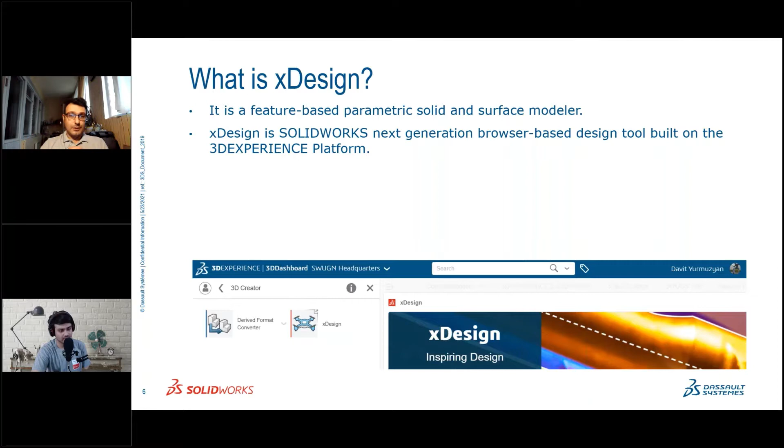It is a very powerful tool designed and developed by Dassault Systemes, and they collect all their powerful tools in one platform, such as CATIA tools, ENOVIA, SolidWorks tools, and other powerful products, and they collect all these in the 3D Experience platform. So xDesign is part of the 3D Experience platform, and xDesign is a cloud-based product.

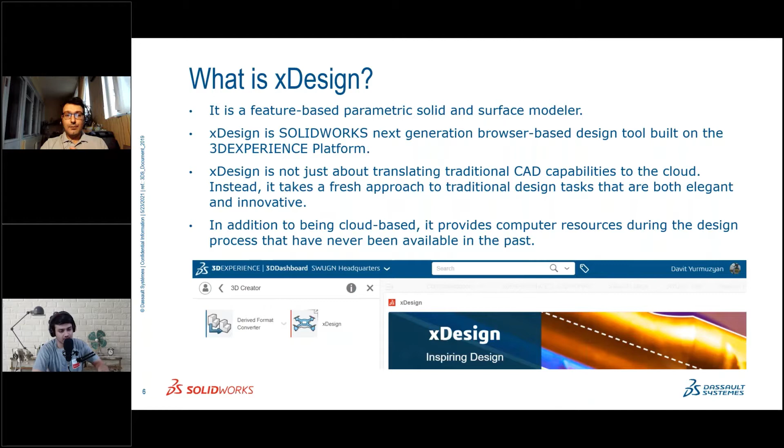I want to say that xDesign is not just about translating traditional CAD capabilities to the cloud, because with xDesign we can solve other design issues, and we can use non-traditional ways for solving them. And in addition to being cloud-based, it provides computer resources during the design process that have never been available in the past.

The main feature of xDesign is that we can run it on all devices, such as desktop, laptop, tablet, smartphones, and it's a very good capability of the product. And also, the next feature xDesign has is that we can run it on any operating system.

It's Windows, Apple Mac, Chrome, Android, Linux, and we can open it in any browser such as Chrome, Edge, Mozilla, Opera, and Safari. So these three things are very good capabilities of xDesign.

Also, I want to say one thing about SolidWorks and xDesign. xDesign and SolidWorks are not competitors, because SolidWorks meets specific engineering needs, and xDesign meets other specific needs. And what I said in the last slides, these features that xDesign has are very, very interesting for designers, for engineers who want to do something in other places, in other locations—this software can help him.

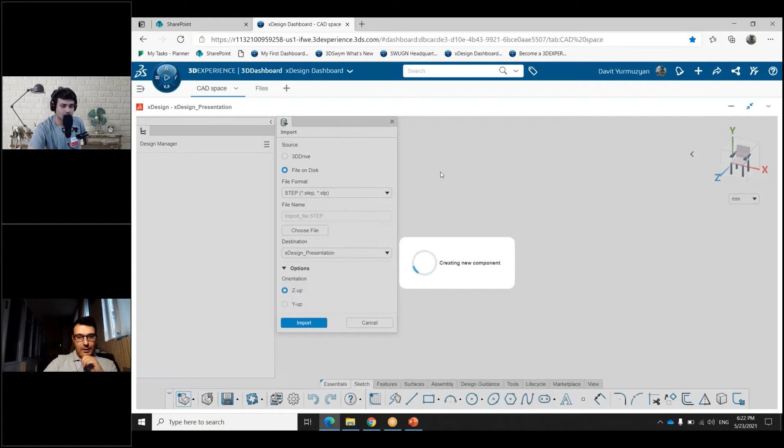Hey, hi Davit. Nikhil, I think his voice is not audible — can you check that? Yeah, his voice is not audible. Maybe he's not connected to the interface. Let me just toss another screen to him. Hello. Just quickly remind him. Hi Davit, I think your voice is not audible, can you please check on that? I think he's not connected to the interface, even he cannot listen, I guess. Okay. Hey Davit, can you hear me? Yeah, your voice is not audible, mate, can you check it out?

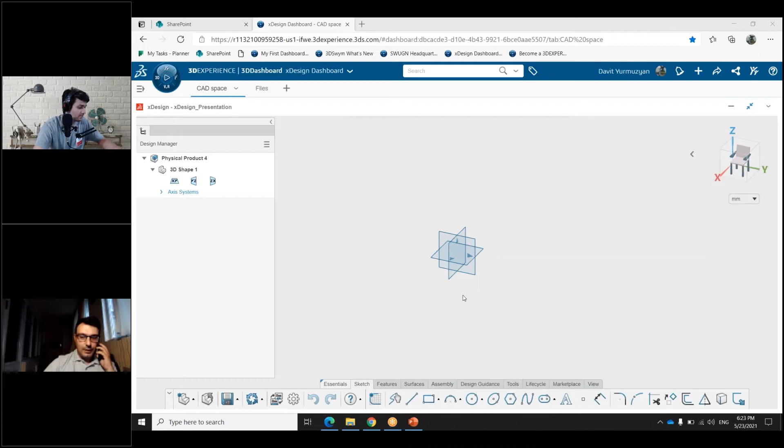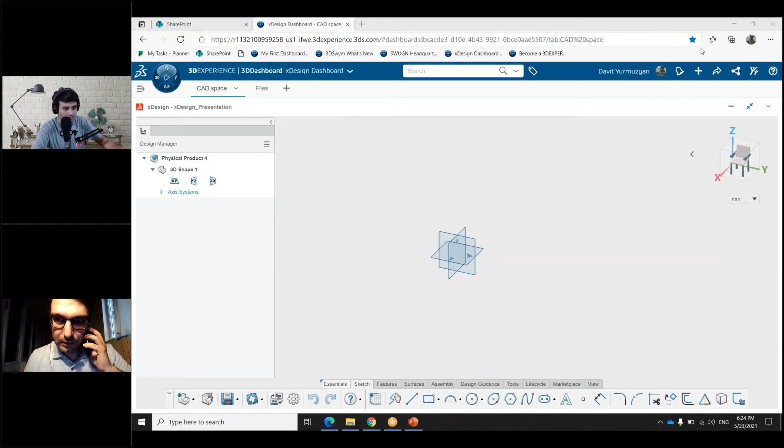Yes, can you check that out? You were not audible a couple of minutes ago, can you check it out? Sorry, can you check it out that we were not audible a couple of minutes before on GoToMeeting? Now you hear me? No. No. Nikhil, can you just ask him to leave the meeting and join again? Hey guys, he will join in a few minutes. Sorry, do you hear me? Yes, we can hear you now, and you again have the access of presenter — you can present now. Okay, in which slide did you not hear me?

Probably the one when you imported the part. Okay.

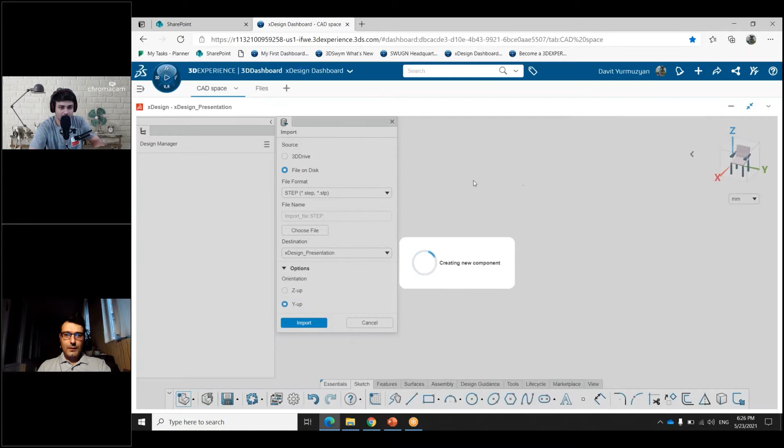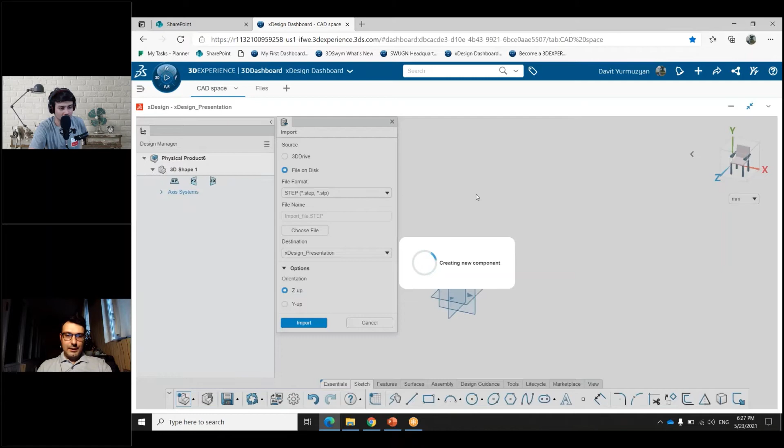So I said that when we import a part, you can choose which axis you want to be up, the z-axis or y-axis. It's a very interesting feature because if you're a SolidWorks user, your parts have the y-axis up, and you can select Y up and import the part. After that, you can see that in xDesign environment the Y axis is oriented up. But if we import and select Z axis orientation up, we will see this situation in the xDesign environment where the Z axis is up. This is a very interesting feature for this software because you can use it like CATIA and like SolidWorks — both SolidWorks and CATIA users have their capabilities in this software.

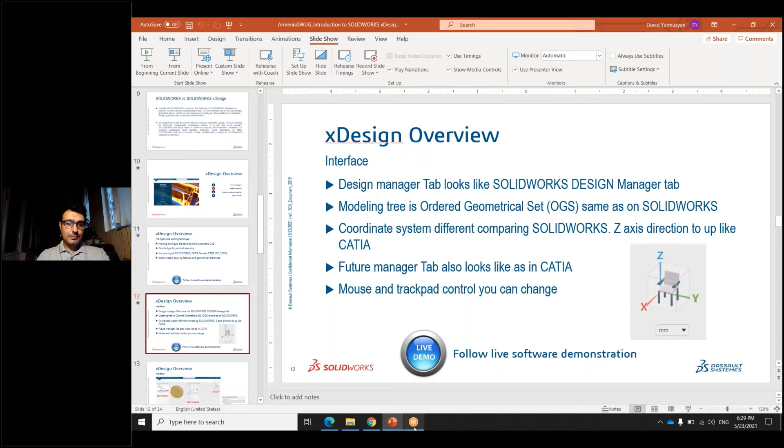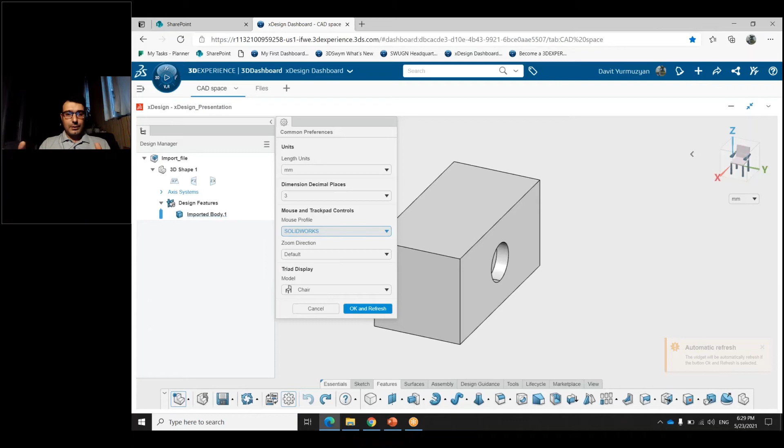Next, about mouse and trackpad control in xDesign. In xDesign we have a preferences option for mouse and trackpad control. If you are a SolidWorks user, you can select SolidWorks, and your mouse and trackpad control will work like SolidWorks. If you're a CATIA user, you can select CATIA, and your mouse and trackpad control will work the same as CATIA.

So this is an overview of the software, and also about tabs. In xDesign we have the same common tabs as other CAD software applications: a sketch tab with sketch tools, a feature tab with feature tools, standard features, applied features, patterns, and direct editing tools. We have a surface tab with surface features, assembly, and design guidance.

This is also a very interesting tab, but that's for a separate time. Maybe next time we can have a presentation about design guidance. There's also a tools tab with measuring tools and other tools, common tools, life cycle, marketplace, and view.

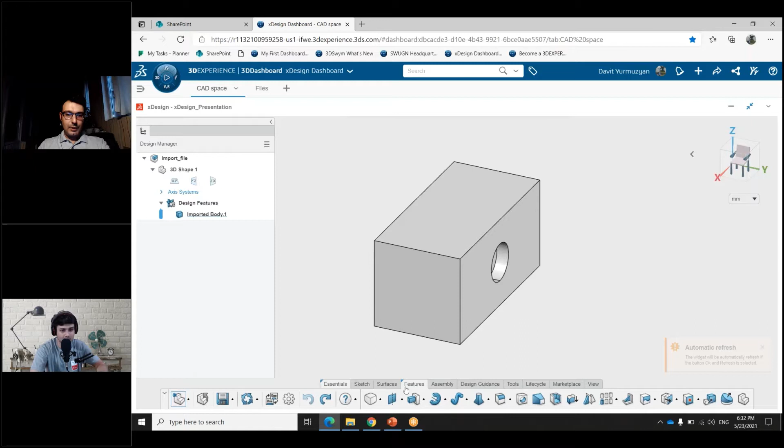So that's about the interface and overview of xDesign. Now we will speak about sketch and feature flexibility.

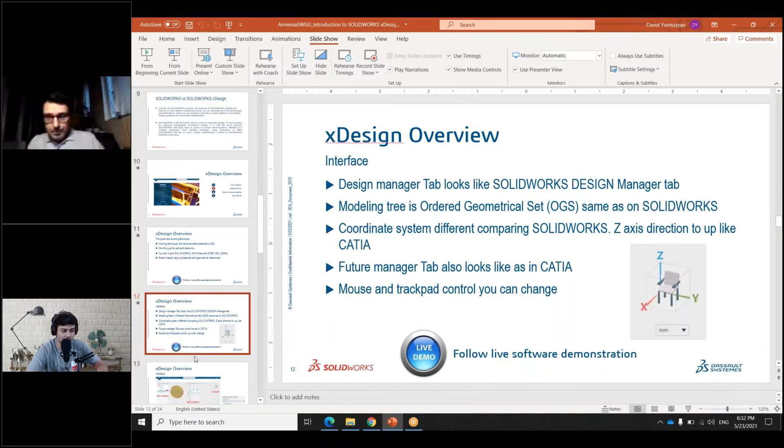So about sketch profiles, I will open a new part, a new component, to talk about sketch profiles.

In xDesign, if a sketch contour is closed, it's shaded. In the latest versions of SolidWorks we also have the same function, and I think it's a very cool feature, because when you're working with many lines and many curves in one sketch and you want to see a closed curve, you can easily see this shaded contour.

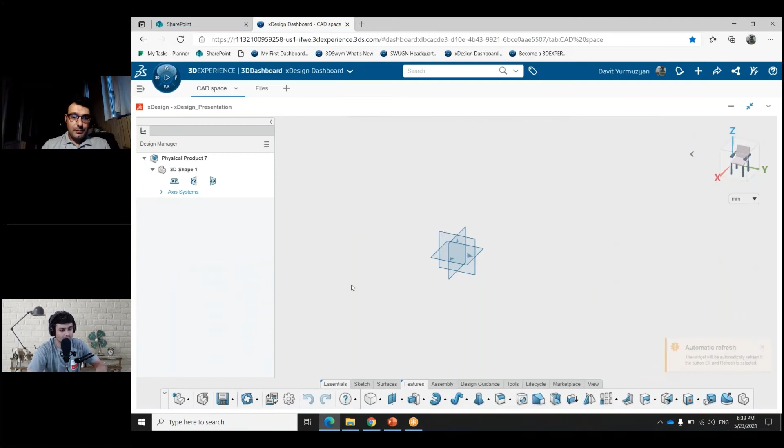For example, I will create a sketch. I can put a rectangle, and put a circle, and we can see that these sketches are shaded because they are closed.

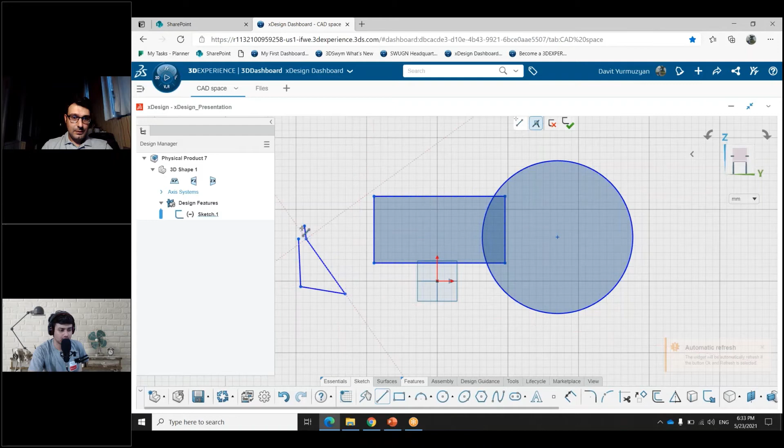If I put a contour that's not closed, this contour is not shaded.

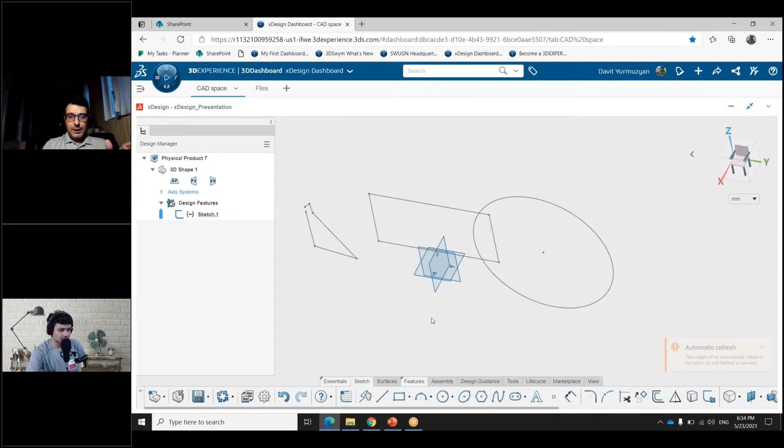This can also help you when you want to create a feature from the sketch. You can select the entire sketch for the feature. For example, for extrude, I can select the whole sketch.

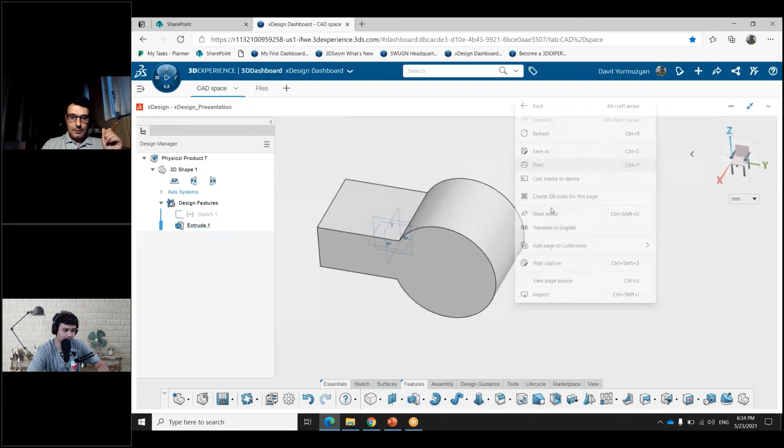And I can have this solid body. If I don't want to use all of this contour, with a double click in xDesign I can select only the part I want.

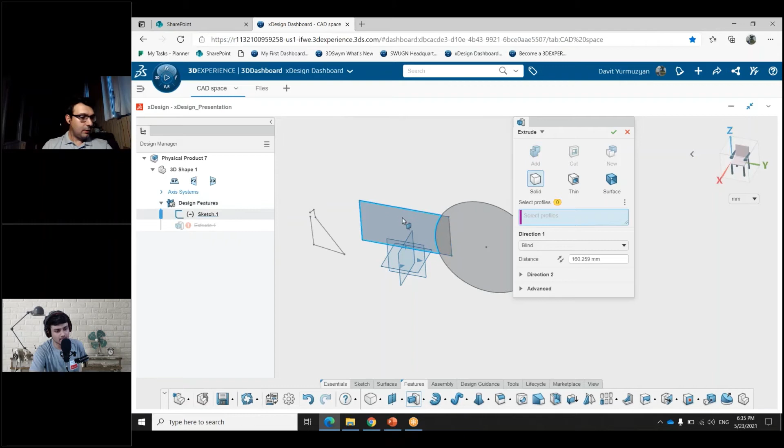So I want to use only this contour and this contour, and I can have this 3D model in the xDesign environment.

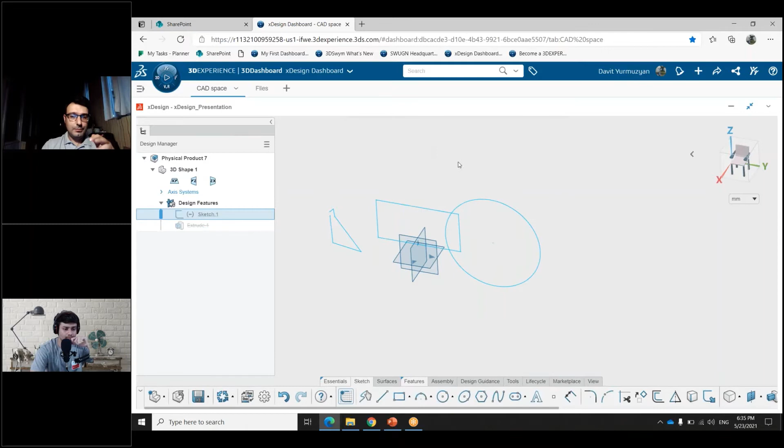Another cool feature in sketch flexibility is when you add a line or other contour to a sketch with edit. So I can add this circle there, and the feature which is based on this sketch does not change.

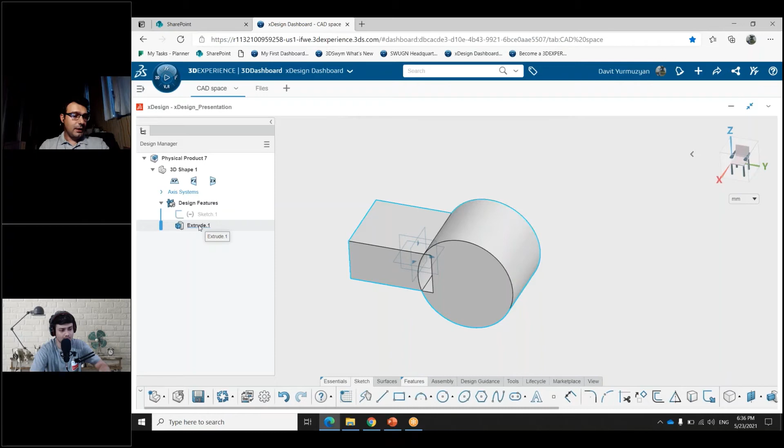In the latest version of SolidWorks we also have this feature, and it's very cool. But in other software I haven't seen something like this. Also in CATIA I haven't seen something like it, I'm speaking about the desktop version of CATIA, because in CATIA on the 3DEXPERIENCE platform we can see this function. So this, I think, is a very interesting tool for this application.

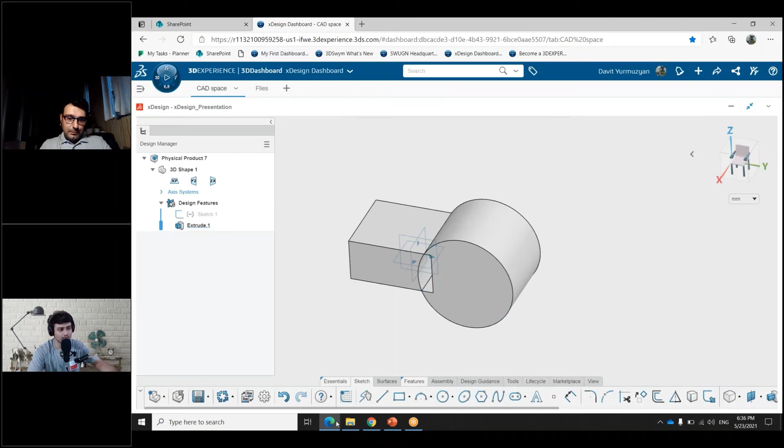Another very interesting tool in xDesign is the Sketch Helper. So what can we do with Sketch Helper? I will close this and open this file.

Even those heads-up displays prove beneficial, they save a lot of time while modeling, right? Sorry, I didn't hear you. The heads-up displays which we get while modeling are beneficial for saving a lot of our time, right?

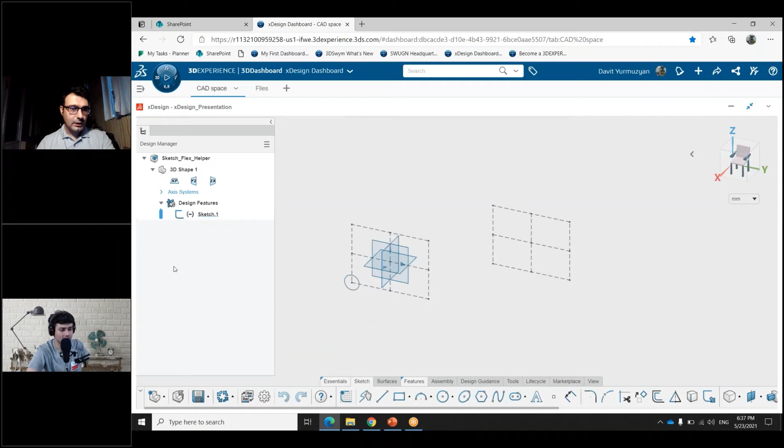About Sketch Helper? Yeah. Yes, but I want to show one thing. Why is Sketch Helper a very interesting tool? Because it's an intuitive tool, and for example, I created a sketch.

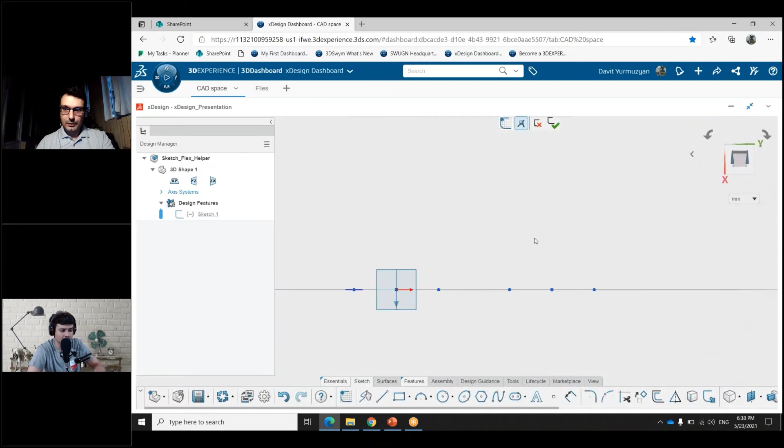When you want to multiply this circle, you can select Sketch Helper, and Sketch Helper can create this circle in any similar places. For example, when we select the checkbox, we can see that Sketch Helper created circles in similar other places, and this is a very flexible tool for sketch design.

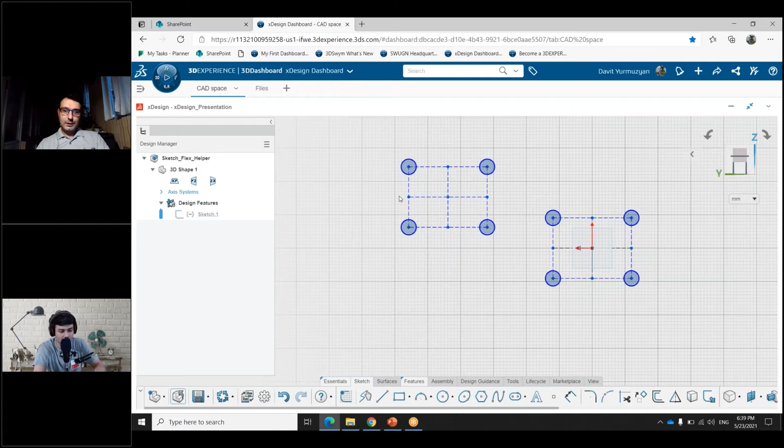So that's about sketch and feature flexibility. Next point, I will close this. Next point is super features.

I want to talk about super features because in other CAD software, also in SolidWorks, we don't have super features. So what is a super feature? I want to note about features, about sketch-based features. We have three main sketch-based features: extrude, revolve, and sweep.

These three sketch-based features: in extrude, we create with one sketch and move the sketch in a direction. In revolve, we use a sketch and rotate it. And for sweep, we move the sketch along a custom curve. So in these three types of sketch-based features, we have one sketch and one direction.

And if we look at it, we see that these three features are similar. In xDesign, we have interchangeability for these three features.

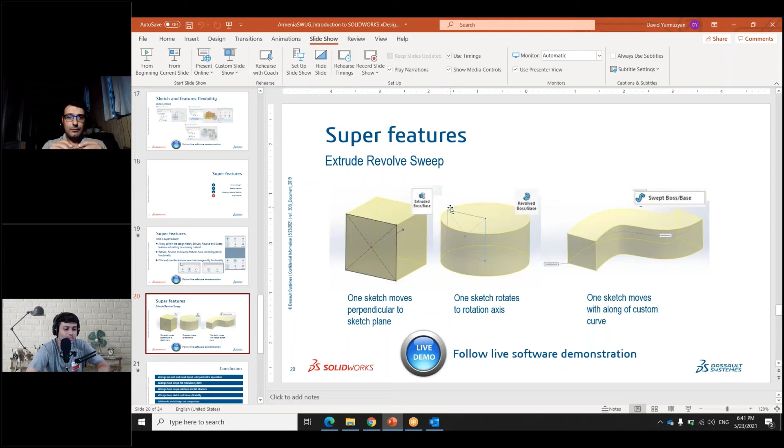At any point in the design process, in the design history or design tree, we can change extrude, revolve, and sweep features with each other, and we can also add or remove the function of these features. So I will open this file.

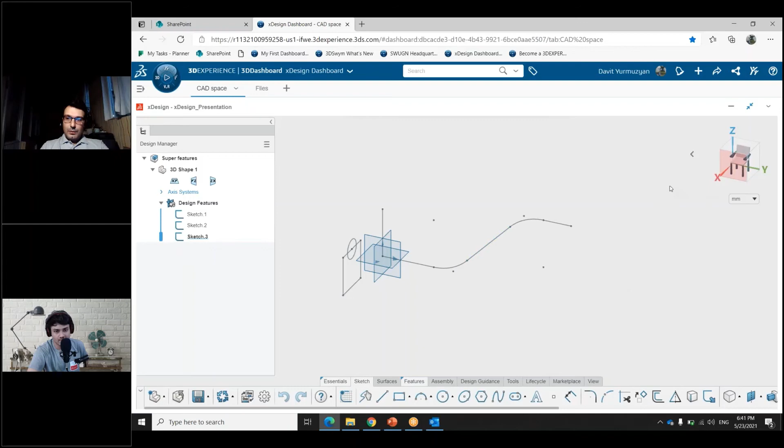So we have this file. Now I will create extrude. I will select this contour and select checkbox, and now we have extrude.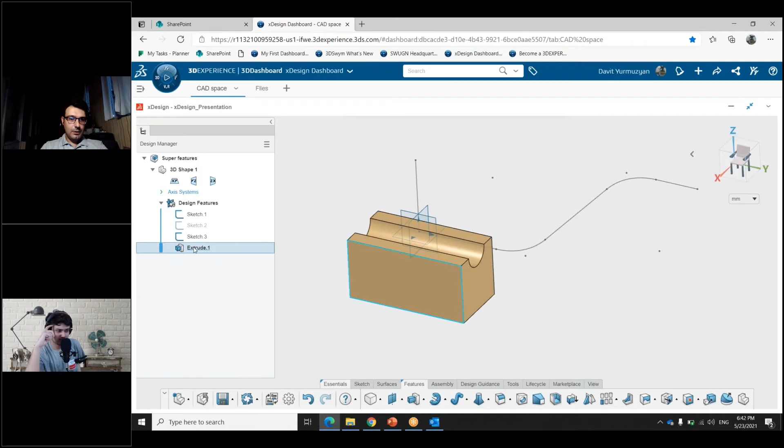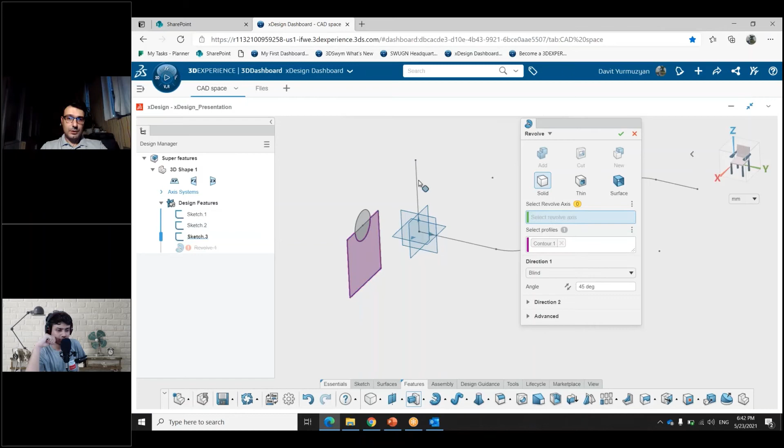But I want to change this extrude to revolve. With double click, I change this icon to revolve, and I will put here axis. I will select this line, and now we have a revolve.

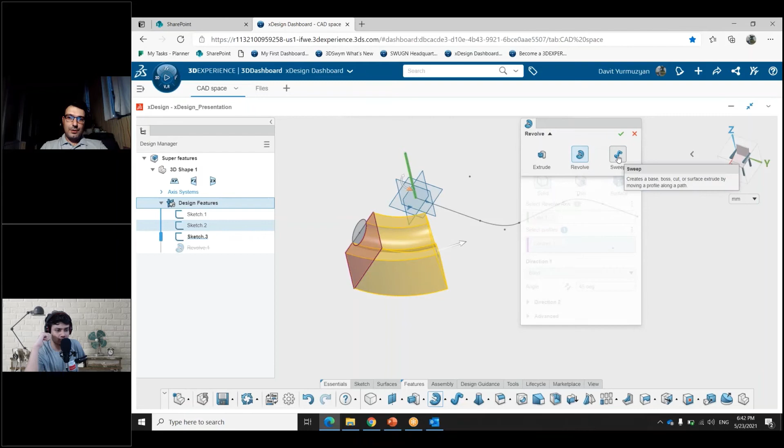If I want to change it to sweep, also I will double click, change to sweep, and select the path. And now I will have a sweep feature.

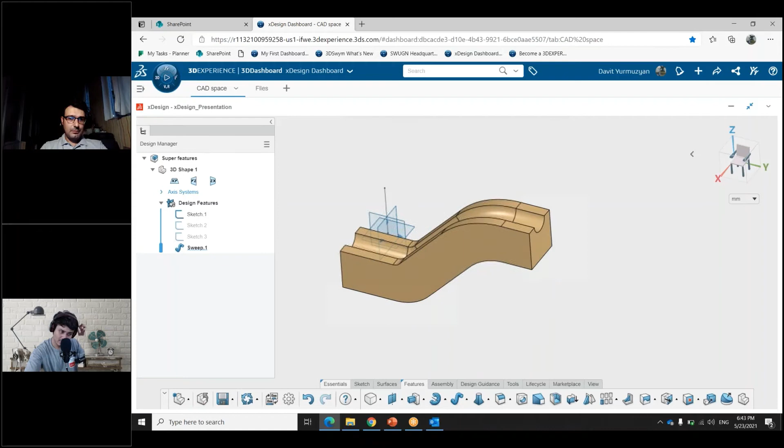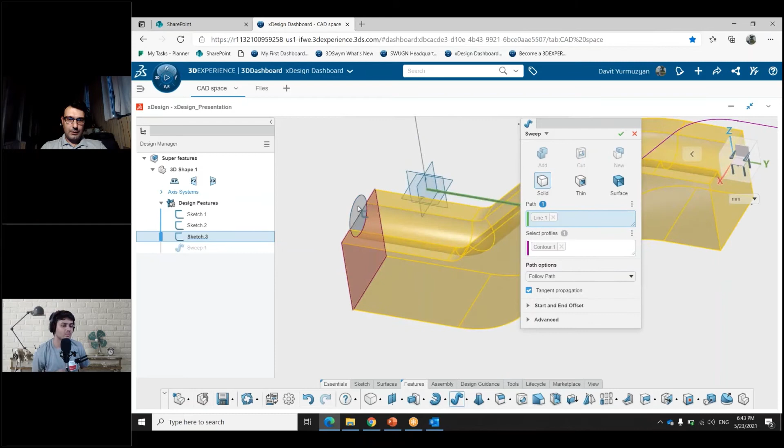So if I want something to cut, unhide these sketches. So I will change sketch contour for sweep. I will add this contour.

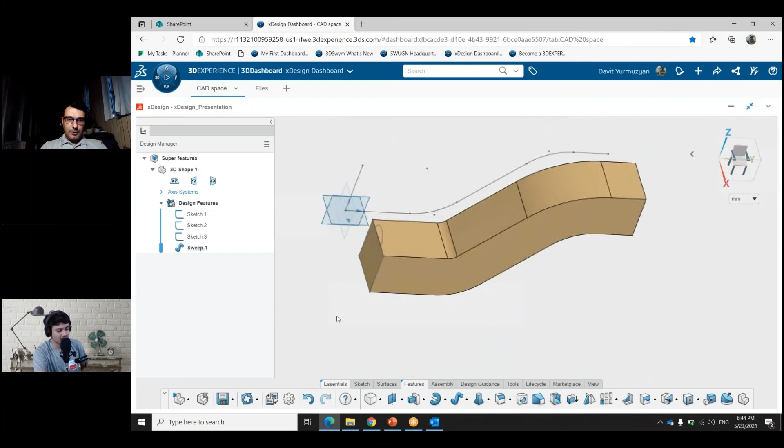And I want to create other sweep with this circle.

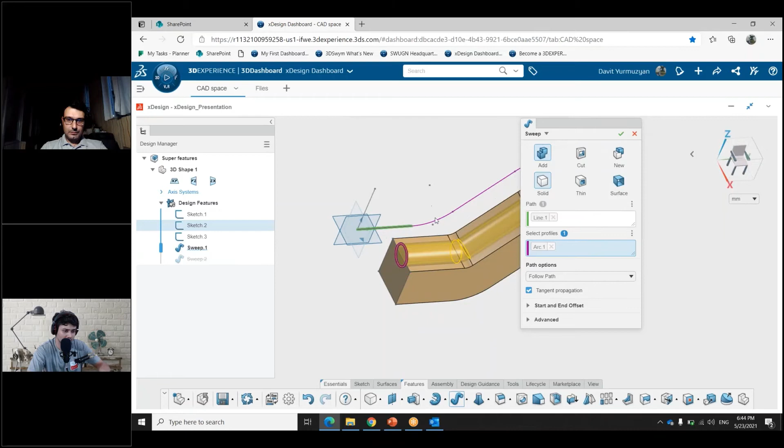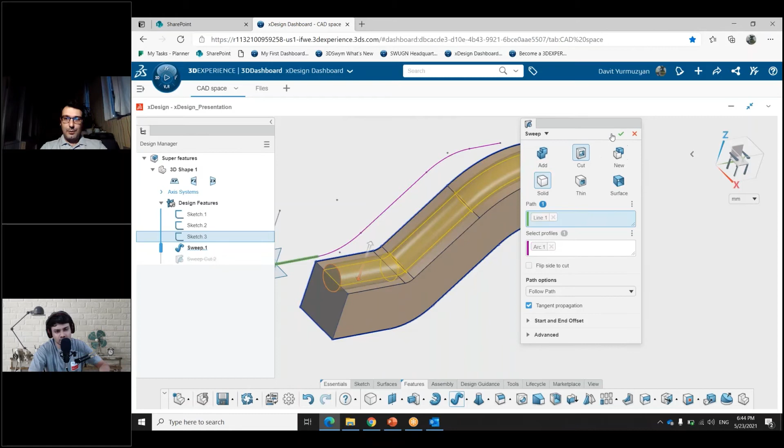And in this situation we add material, but if I want to remove material, I can double click this sweep and change add material to cut, and we will have cut our sweep.

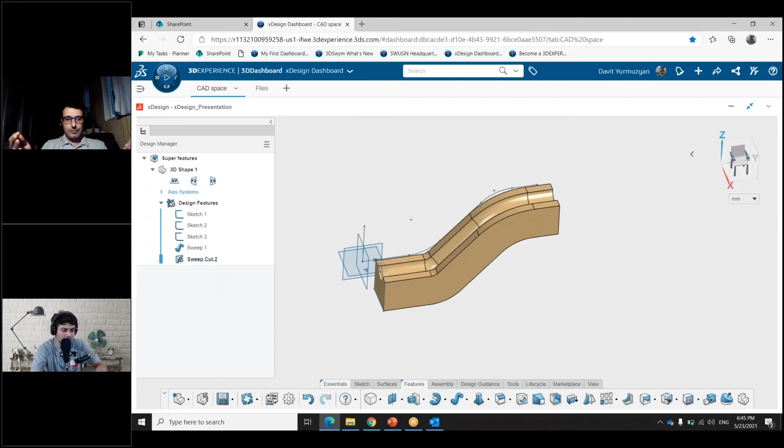So I think this is very interesting feature for xDesign. Maybe not usable because not every time you want to change extrude to revolve or to sweep, because when you model some product, you know which features you can use for this product, and maybe this interchangeability for this feature is not usable. But in xDesign we have also interchangeability in super features for applied features.

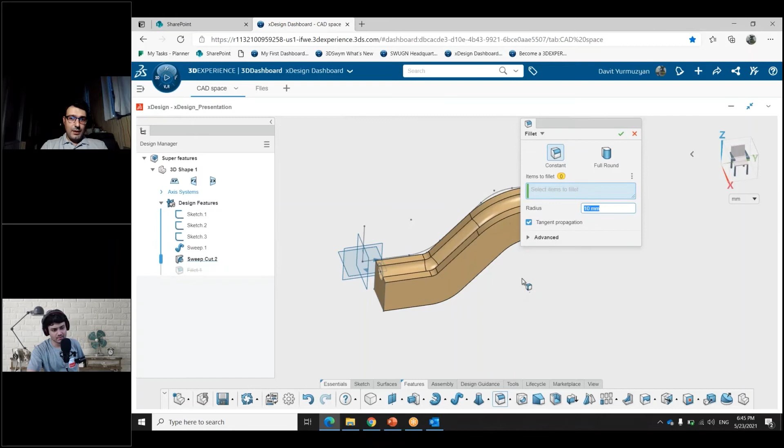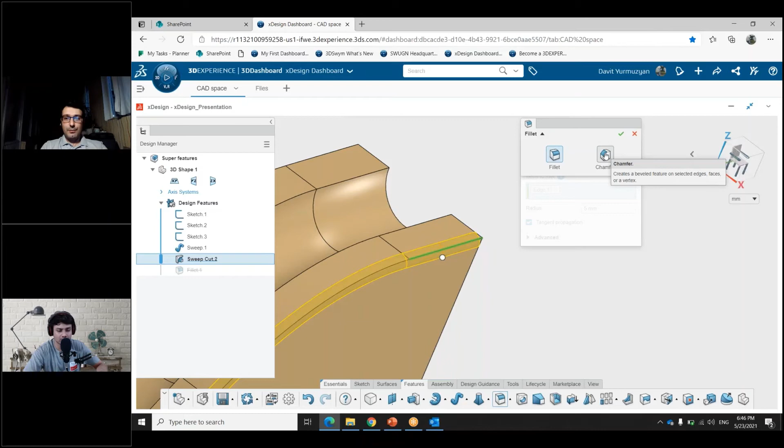For example, for fillets and chamfers. So I will create fillet. So we have a fillet, but if I don't want to use fillet, I can change with double click on fillet, and there I can change it to chamfer, and we can have chamfer.

So this super feature for applied features, for example chamfer and fillet, I think it's a usable feature because sometimes you need to change chamfer to fillet or fillet to chamfer. For that you will roll back in the tree, delete the old feature, add the new feature, and then roll back to the end of the part.

And if you can use this function, you can double click on the feature in the tree, and you can change fillet to chamfer. So I think this tool is very interesting for xDesign, and if developers can use this feature for chamfer and fillet in SolidWorks, new SolidWorks version, it will be a good idea and very good for designers and engineers.

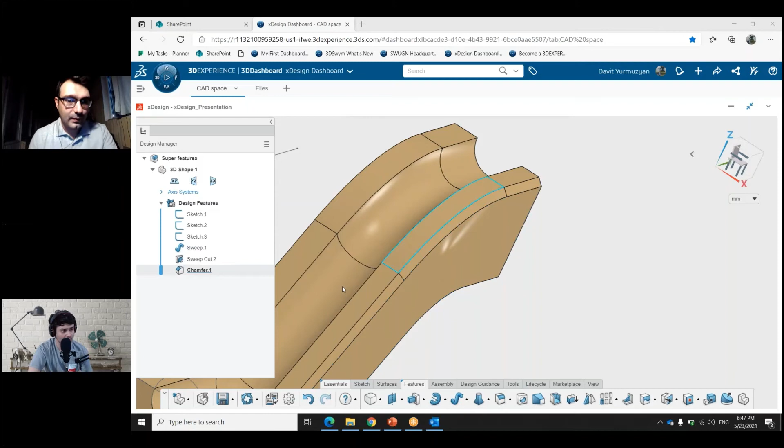So that is about super features. So what we finally have, I want to conclude. So what we have.

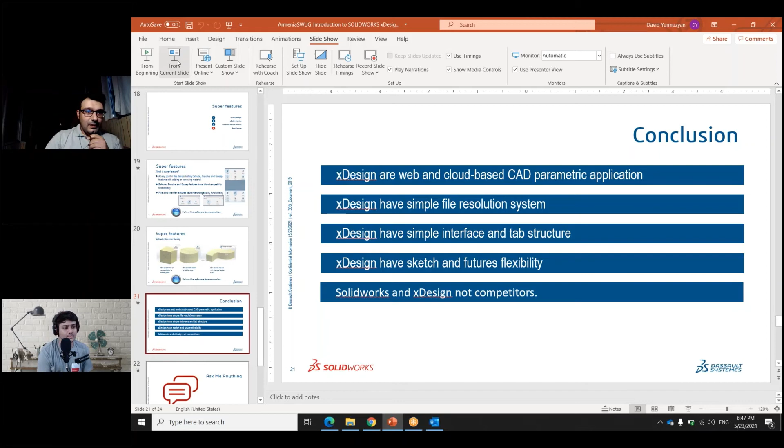We can note that xDesign is a web and cloud-based CAD parametric application. We can note that xDesign has a simple file resolution system. Also, xDesign has a simple interface and tab structure.

And fourth, xDesign has interesting and specific features that we can't see in other similar CAD applications, such as super features for sketch-based features such as extrude, revolve, and sweep, and also for applied features. So for scale, for chamfer, and for fillets, and also about sketch and feature flexibility and sketch helper, which is a very interesting tool for sketch creating.

And finally, I want to say that SolidWorks and xDesign are not competitors, and they can't be competitors because they both work together. They both, how it's said, solve specific engineering needs.